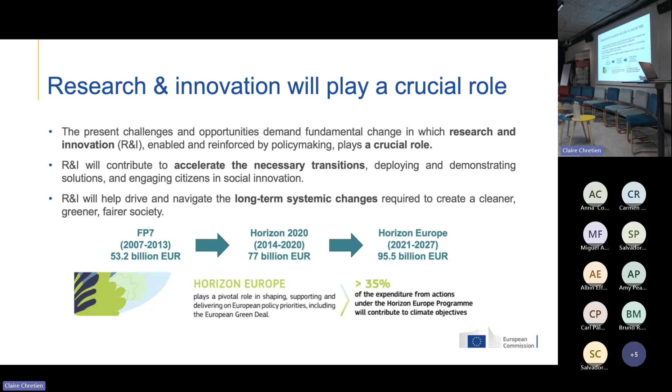Let's now go back to Horizon 2020 and process industries. And there we find the SPIRE partnership, a public-private partnership for the sustainable process industry through resource and energy efficiency. These public-private partnerships are a key implementation tool in H2020 and remain key in Horizon Europe. Through these public-private partnerships, the European Commission comes together with a private partner, and together they address the most pressing challenges of Europe, also through concerted research and innovation initiatives.

So the aim of this partnership was to integrate, demonstrate, and validate systems and technologies that were able to reduce the use of fossil energy, to reduce the use of non-renewable primary raw materials, and at the same time have a significant contribution to efficiency improvement. The relevance of this partnership is clear, as process industries are key for the European economy, but at the same time, they are resource and energy intensive, and as such, today they generate large amounts of greenhouse gas emissions and waste. Therefore, they must play a key part in the transformational efforts that are needed to achieve climate neutrality by 2050. This partnership received in Horizon 2020 more than 620 million euros and had more than 90 H2020 projects.

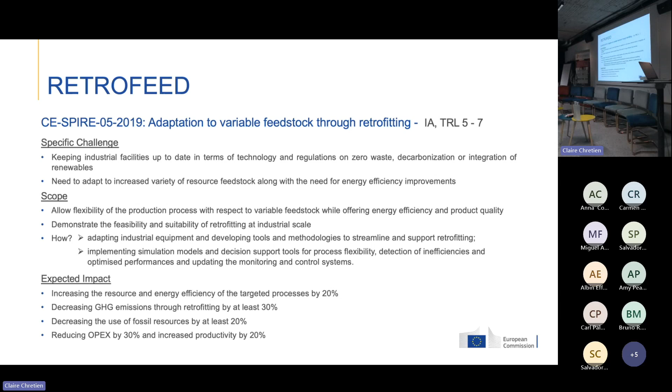Within a retrofitting strategy, the topic makes emphasis on the use of digital tools and advanced control and monitoring systems that allow having a high increase of energy and resource efficiency, while at the same time decreasing greenhouse gas emissions and the use of fossil resources, and also reducing OPEX and increasing productivity.

And indeed, RETROFEED deals with the implementation of a smart retrofitting framework that allows for this high increase of the resource and energy efficiency in 5 energy-intensive sectors through 6 demonstrators at 6 industrial end users.

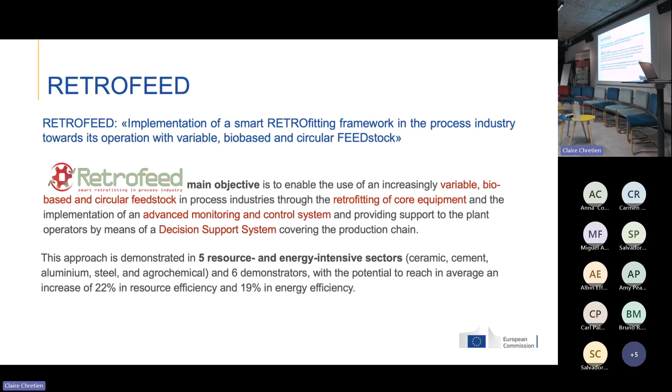Well, we will have the opportunity to learn on the achievements and results of the RETROFEED project during this morning, but from my side, I want to emphasize now the importance of demonstrating the feasibility of these new technologies at operational industrial environment, as in this way they come closer to the final industrial uptake and the final full-scale deployment. And it's actually in this way that projects like RETROFEED contribute to achieving the climate neutrality goal by 2050.

Let me now jump to Horizon Europe. Process industries in Horizon Europe are addressed in Cluster 4, Digital Industry and Space, and in Destination 1, Climate Neutral, Circular and Digitized Production, where we find topics related to 3 partnerships, among which we have Processes for Planet.

And as a continuation of SPIRE, Processes for Planet partnership aims to develop and deploy climate neutral solutions to close energy and feedstock loops and to achieve a global leadership in climate neutral and circular solutions, accelerate innovations, and unlock public and private investment. The Processes for Planet partnership in Horizon Europe in the first 2 years have received almost 315 million euros. And in the coming 23-24 work program, it is estimated to have more than additional 330 million euros.

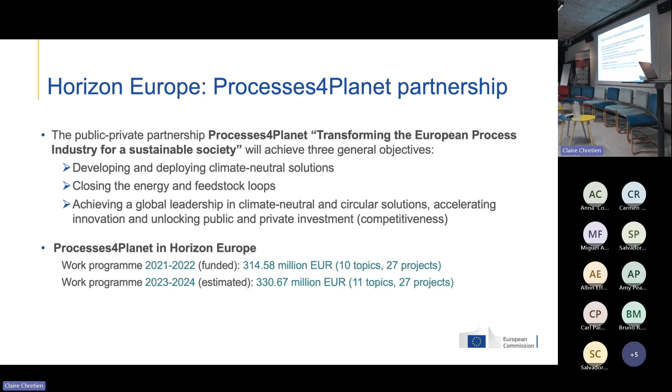So the call for 2023, including topics on Processes for Planet, is already closed. But in September, we have opened the call for 2024 with deadline 7 February. And here we find 5 topics related to the partnership. In relation to energy efficiency and climate neutrality, we have these 3 topics. 1 innovation action on optimization of thermal energy flows in the process industry with a budget for the topic of 30 million euro.

Then we have renewable hydrogen used as feedstock in innovative production routes, which is a research and innovation action with 20 million euro budget. And we have turning CO2 emissions from the process industry to feedstock, another innovation action with a budget of 30 million euro.

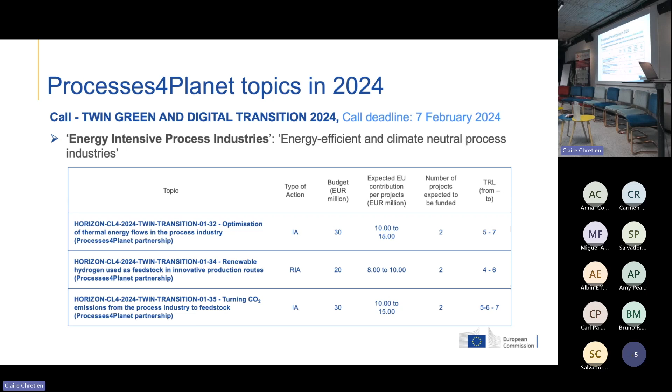In connection to circularity and zero pollution, we have an innovation action, hubs for circularity for industrialized urban peripheral areas in connection to industrial and urban symbiosis with a budget of 40 million euro, and a research and innovation action, breakthroughs to improve process industry resource efficiency with a budget of 30 million euro.

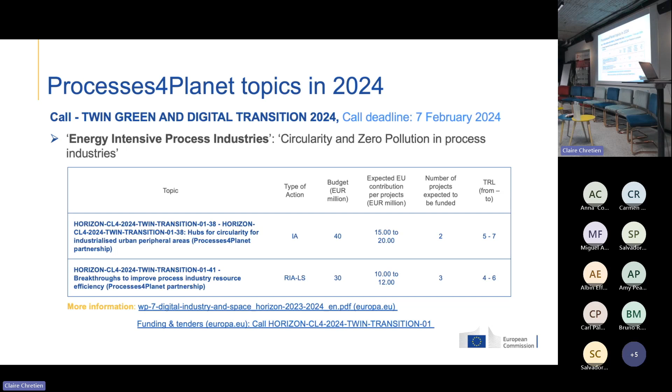If you are interested in joining a consortium or in building a consortium and applying to any of these topics, I invite you to read the full description of the topics in the work program of 2023-2024, Cluster 4, or directly in the Funding and Tenders portal.

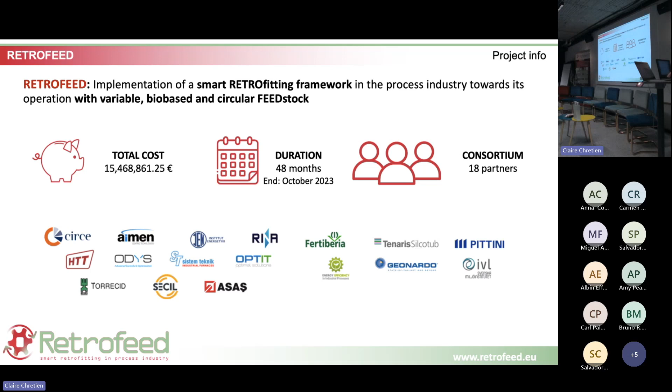So our project is an industrial project. We have a total of 6 demos in 5 sectors, and we have a total of 18 partners with the RTOs. Our project has lasted 48 months and has a large budget with a large contribution from the European Union. Our main objective stated here is to enable an increasingly variable, bio-based, and circular feedstock in process industries.

And we aim to do this through the retrofitting of core equipment and the implementation of advanced monitoring and control system, and providing support to the plant operators by means of the development of a DSS covering the whole production chain. As you can see, we are implementing this approach in 5 sectors: the agrochemical, aluminum, cement, ceramic, and steel.

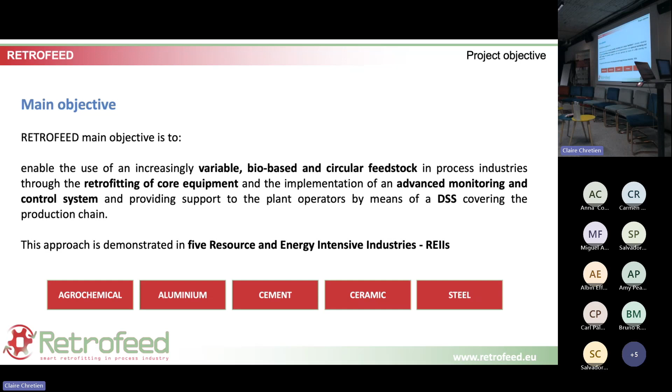These are our intended impacts. As you can see, they are challenging impacts. So we aim at a 22% in resource efficiency, 19% in energy efficiency, and we also, of course, want to save emissions in CO2 and save costs for the companies.

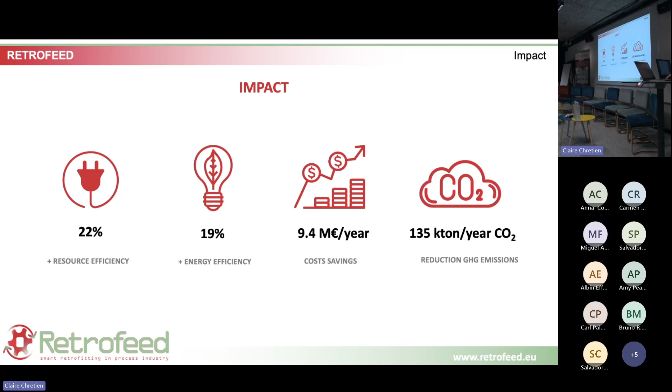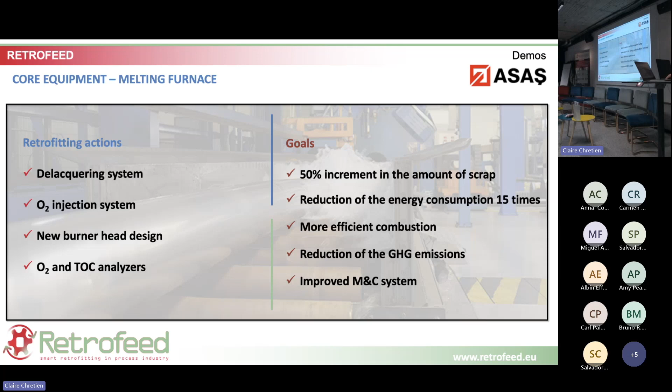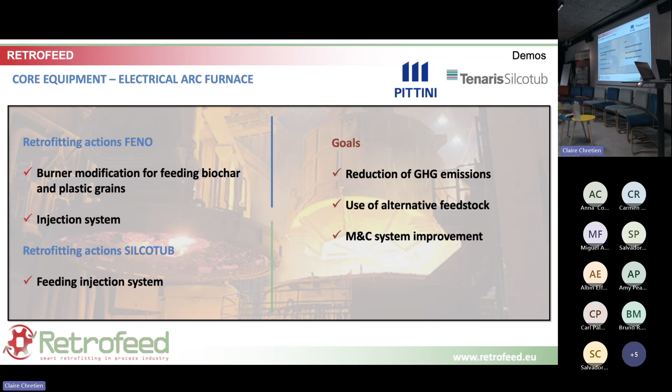In the steel sector, we have two companies, Feno Pittini and Tenaris Silcotub. The goals in both cases are similar: to reduce GHG emissions, use alternative feedstocks, and improve monitoring and control system. In Feno, they have already installed and are using a new injection system and a burner modification to feed biochar and plastic grains, which is allowing to reduce the amount of anthracite that they are using, so they are reducing their dependence on fossil fuels. Similarly, in Silcotub, they are using a new feeding injection system to use alternative materials.

In Fertiberia, in the agrochemical sector, the goal is to replace 10% of the currently used phosphorus sources, to recover valuable materials from waste, reduce cost, and improve monitoring and control system. Here, the main retrofitting action is the installation of a new reactor, a new design of a chemical reactor for these alternative phosphorus sources.

In Secil, in the cement sector, the goal is to reduce emissions, CO2 emissions, to replace the currently used fossil fuel by alternative materials, RDFs in particular, to increment the efficiency of energy and also to improve monitoring and control system with novel monitoring tools based on imaging and also other imaging techniques to check the quality of the clinker.

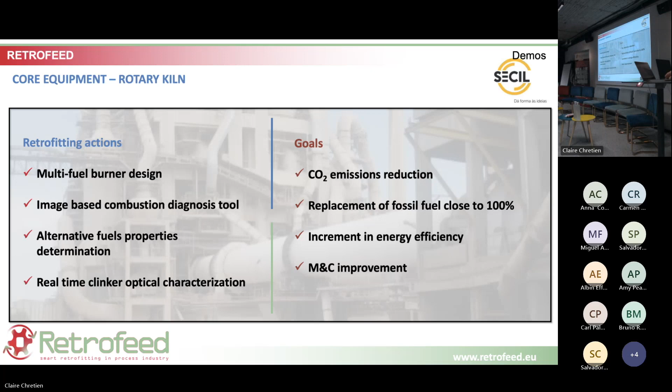So they have implemented already a new multi-fuel burner that is what allows them to use RDF. As I said, the image-based combustion diagnosis tool, the monitoring systems to assess the quality of the clinker. And this has already been installed, that is already running also.

In the ceramic sector, Torrecid, they aim and have achieved already savings in energy and material, optimization of the combustion thanks to the recuperation of heat from the fumes of the furnace, and improve their monitoring and control system also. So they have already installed the new heat recovery system, the new sensors based on imaging and oxygen sensors, and they have connected these sensors to their control system.

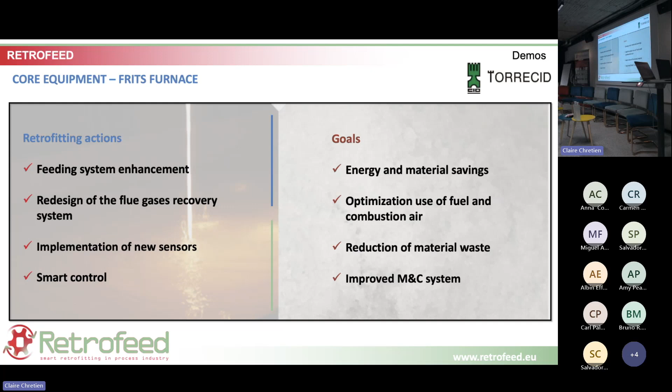So this was the demos in a nutshell. And to conclude, I would just like to say that I consider that this has been a successful project so far.

We have faced two major challenges, which are the COVID pandemic and the later energy price crisis due to the invasion of Ukraine. In spite of this, we have managed to have 5 of our 6 demos up and running already and obtaining results. Only one demo is delayed, but they are going to complete their activities in the next months. So we can say that we have all demos almost running.

Our results are in line with the foreseen impacts already, and I'm sure that they will be better when all fits in place. Several of our solutions are beyond intended TRL because they are already in the market or almost market ready. And so, as I say, I consider this has been a successful project, and I'm really happy and proud to have been a part of it.

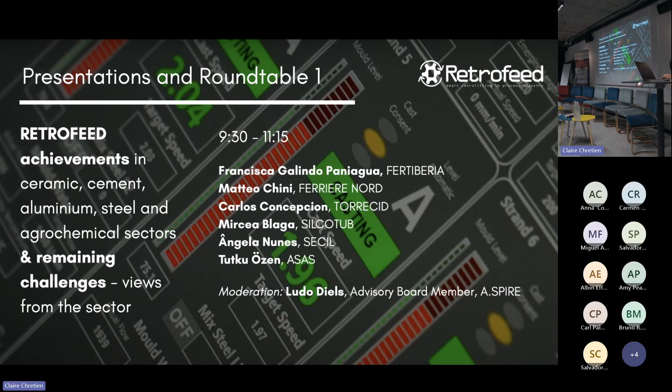Good morning. My name, as you can see, is Francisca Galindo Paniagua. I'm working for Fertiberia Group. I'm the technical director, and I'm the leader of Work Package 9, which had to do with the demo in the agrochemical sector. I will start explaining what is Fertiberia.

Fertiberia is a fertilizer company, and we like to say that it's not only a fertilizer company, but we are very much concerned about environmental issues, and we got a lot of solutions, not only for the farming, but also for environmental application. For example, the reduction of NOx in the combustion processes.

You can hear me? Can you hear me? So I can leave the micro here.

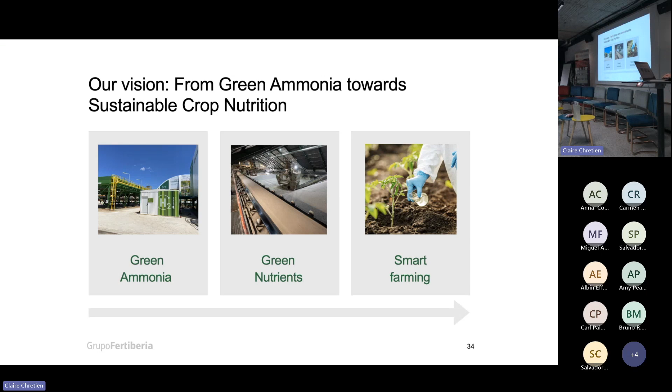It's all based on green ammonia, because this is a roadmap to 2035, where you can see we have reduced a lot of GHG gases up to more than 50%, but there's a gap that is needed to be reduced, and it only can be done through green ammonia, because ammonia is a raw material for all nitrogenous products, which is the main nutrient for fertilizers.

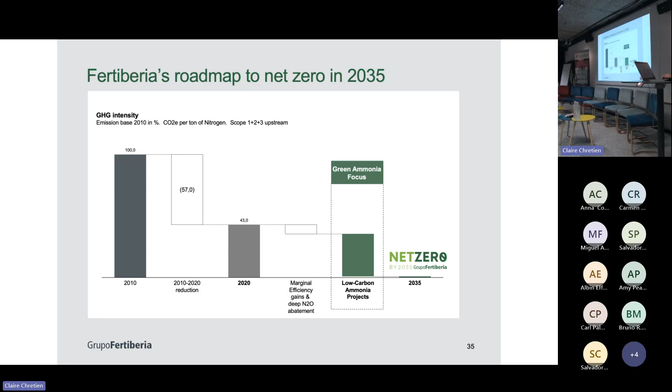This is our net zero project. There are many projects involved in this net zero for 2035. And we have to say we are the first company in our sector in Europe that is going this way and have done the first step. But here you can see how many projects we got related to this net zero goal.

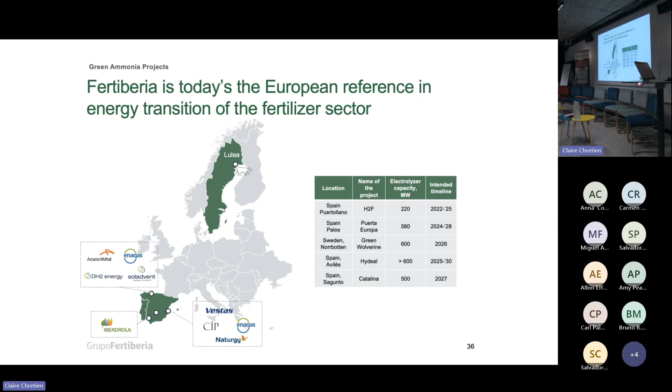In this moment, we are running 5 projects, 4 of them in Spain, all to produce green hydrogen, and from green hydrogen, green ammonia, and also a green complex in Sweden, in Luleå, based on green hydrogen to produce green ammonia, and so all green fertilizers. Green.

This is our first step, which is a reality. It's in Puertollano. It's based on a solar field of 20 megawatt. We produce from this dedicated solar field energy for electrolyzers, and from this electrolyzer we produce green hydrogen and then green ammonia, and it's now a reality. And the last step of the reality is the new Fertiberia line, which is the Impact Zero line, fertilizer based on this green ammonia.

So I will go directly to our project, which is this retrofit for NPK plants in Huelva. The main objective is the valorization of waste streams as alternative phosphorus and sulfur sources in the Fertiberia site in Huelva. That means we are going to produce fertilizer with at least 10% of the raw material based on circular economy phosphorus.

We already have run some Horizon projects which are based on this circular economy, one which is finished, and a parallel one. But this is very important for us because we are going to use this raw material directly in our plant.

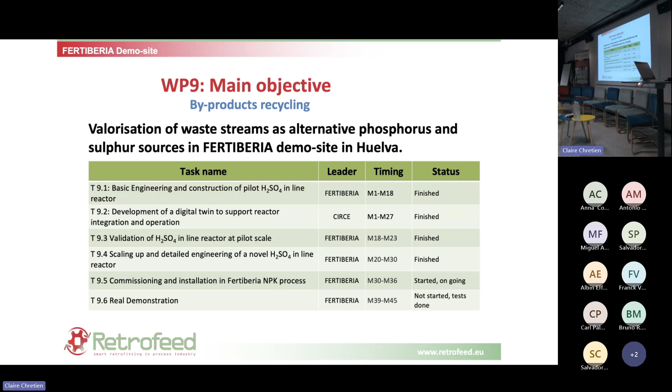For that, we have designed a new reactor, which will be run, but has been run in a pilot plant, to produce ammonium sulfate with ammonia and sulfuric acid in a direct reactor to the granulator. This is very tricky because the reaction is very exothermic and produces a lot of problems in the plant. But in the pilot plant, it's been very successful because we even reduce a lot of the energy consumption. You will see that. Well, in the last slide, I showed you all the steps, all the tasks we have done for this project.

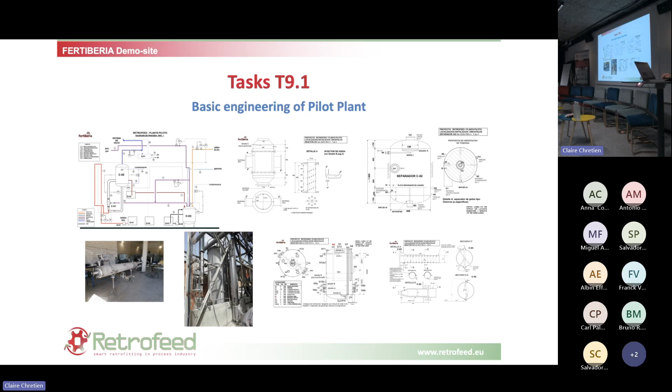The first step was the design of the pilot plant, the basic engineering. It was done in time. The second one is the development of a digital twin. The third one is the pilot plant. It was very much delayed due to the pandemic.

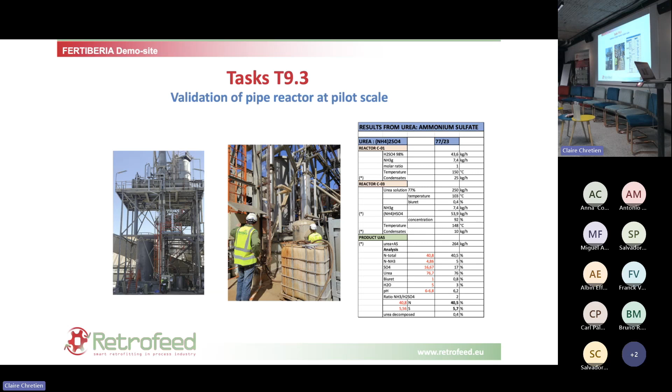We suffered a lot of delays due to the construction of the equipment, and also then the running of the plant, because after the pandemic there was a big energy crisis due to the war and due to the rise of prices. So we had to stop the main plant, and without the main plant running, we couldn't run the pilot. So the delay was for more than 1 year, and well, at last we could run the plant and have very good results. I will talk about them.

Task 9.4 was the scaling up of the pilot. We could do it even before the pilot, but we finished it. Here you can see some part of the engineering. And the fifth one was the commissioning and installation in Fertiberia NPK process. It is unfinished. Part of it is done. For example, some modification in the granulator or new equipment that had to be installed.

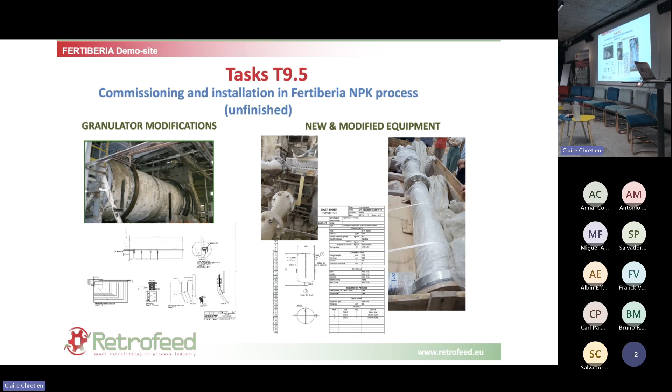And the main reactor that you can see on the right of this slide is the pipe reactor that will be installed at the beginning of next year. It's already in the plant and waiting for the production to stop for a long time, because we need at least 1 month.

This is a compromise. We agreed with Lucia to do some demonstration as an alternative to the last task, which is the real demonstration, but using some sparger we installed in the granulator and premixer, but the result was not conclusive because the plant had a lot of unstable situations.

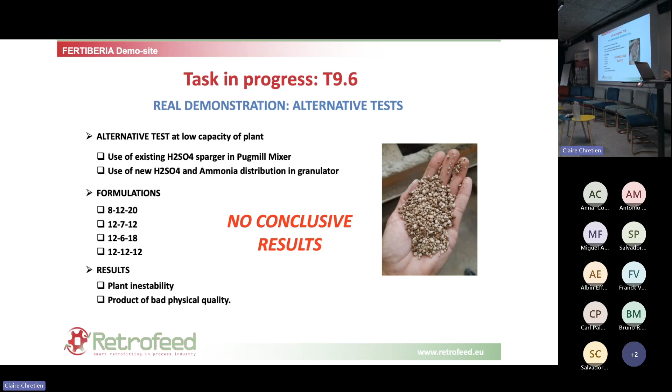And these are the last retrofit results. I would like to show you it in capital letters, but I cannot boast as we didn't finish the project yet. But I can have some results from the pilot plant. We tested and proved that we can have an important reduction in energy consumption, as the plant is now consuming half tons per hour of steam that is produced in the boiler using natural gas, and also using natural gas for the dryer. We reduce this steam consumption by 100%, and we will reduce also the consumption in the dryer because the temperature of the reaction will be raised, and so we won't need this steam and lower natural gas.

Also, we have demonstrated that we can replace the ammonium sulfate by the sulfuric acid and ammonia reaction. In the plant, we've got a successful result. And so we can have an acidic slurry that can digest the ashes and struvite, etc., that we are going to use in the real plant.

Good morning everyone, my name is Carlos Concepcion from Torrecid. First of all, I would like to thank Roberto for making the introduction of Torrecid and the work done in the framework of the RETROFEED project.

Torrecid has been in charge of the ceramic demo within the project, and the overall objective was the retrofitting of equipment and implementation of advanced monitoring and control systems, allowing the use of variable feedstocks, improving the overall environmental performance. Why is this important for us? It's important because improvement and innovation is already written in the mission of Torrecid, which is to provoke change through global leadership innovation of process and products, creating new solutions and technological and fashion trends. This is why innovation and improvement is important for the company.

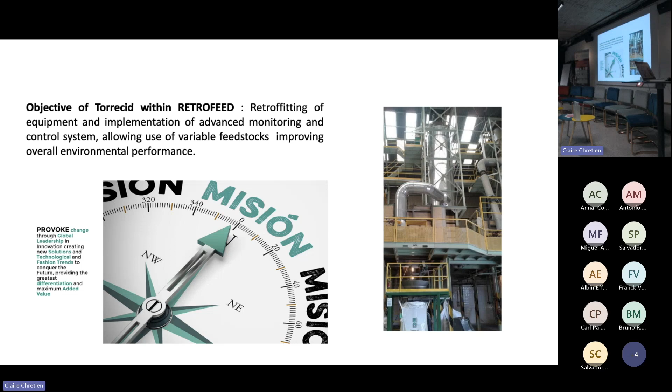You may ask, who is Torrecid? Because some of you know Torrecid, but not all of you. We are a globalized multinational family founded in 1963, supplying products to the ceramic sector, and nowadays also the ceramic, plastics, textile, and glass sectors. We supply a lot of different products - I don't want to go through all of them: frits and glazes, enamels, ceramic decorations, inkjet inks, pigments for plastics, glass decoration, construction materials, textile decoration, and so on. The company has 29 subsidiaries throughout the world, and 7 of them are located in Europe.

You may ask now why retrofit is important for us. Retrofit is important because we are an energy-intensive industry. We use more than 25,000 tons of natural gas per year for the melting of the frits. Not only the natural gas and the CO2 emissions, but also we use a lot of water - more than 500,000 cubic meters per year are used in the process, and we have to refill this water.

Also, the basic product, which are the frits molten in the furnaces, we change the product every week, more or less. So we have a huge range of products being molten in the furnaces. Consequently, we produce a lot of different waste, and we have quite flexible feedstocks. Therefore, we need to reduce emissions, reduce natural gas consumption, improve the performance of the furnaces, as well as reduce all the waste and streams involved in the process. This fits perfectly into the RETROFEED project.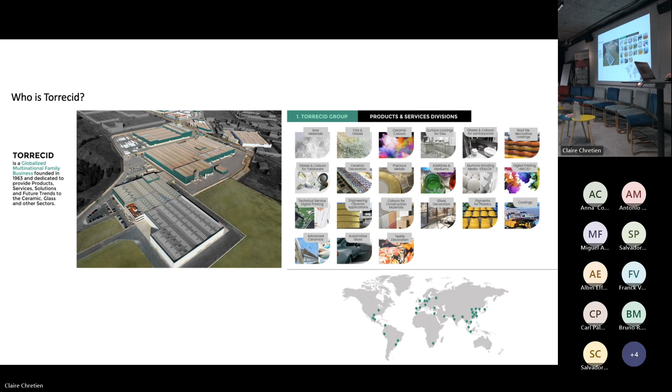What has been done in Torrecid? This is the basic diagram of what a smelter is in Torrecid. We have raw materials that come into the smelter, we have natural gas, oxygen, air. We get fumes at 1,300 degrees, and they go out to the exhaust. Then the molten feed comes out, is water quenched and dried. So we need a lot of gas, a lot of water, and we get a lot of fumes out of it. So what has been done in Torrecid?

We have optimized the thermal recovery of the waste heat. We have developed tailored control and sensor systems to optimize the material and energy flows. We have developed a new DSS tool, and we have worked towards the reduction of waste streams. These are the 4 areas in which we have worked.

And what has been achieved in the RETROFEED project?

We have validated optimized waste gas recovery systems, allowing us to reduce CO2 emissions by 15%. A new high-temperature heat exchanger has been installed. We have modified the burners so we are able to use waste streams of up to 800 degrees in the burners as air.

We have also modelized the frit and its composition, adjusting the compositions of the frit to the melting conditions. Together with the partners, we have developed and validated a DSS tool.

This system has allowed us to optimize the program of the frits being molten. As I told you before, in one month we can melt up to 15 different compositions, and we have been able to reduce waste materials by 50%. We have also installed novel sensors, approaching Industry 4.0.

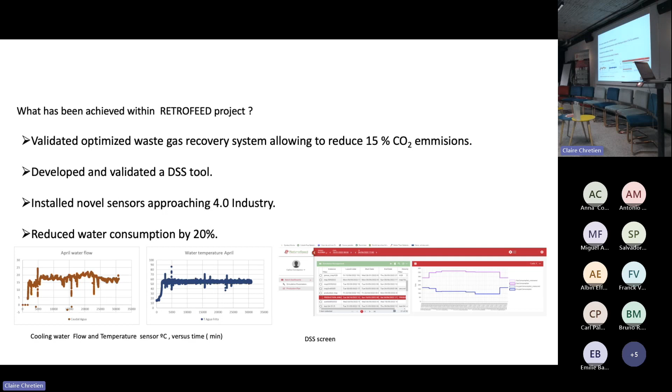So overall, we can say that this has been a quite important project for Torrecid, allowing us to reduce the overall impact of the company on the environment.

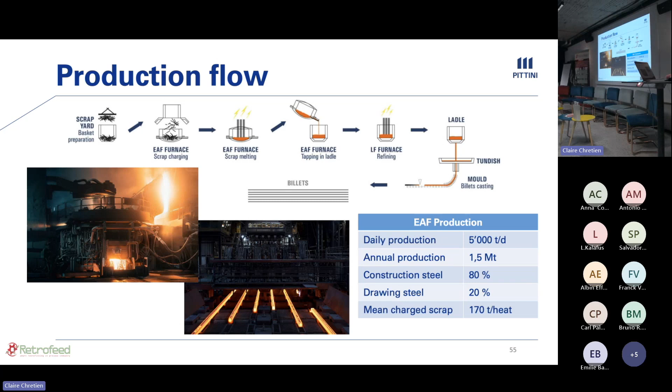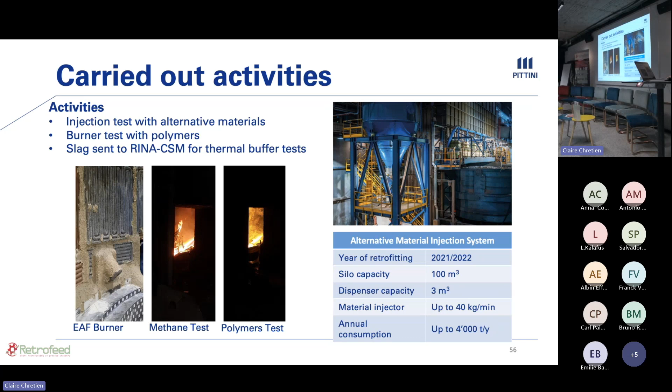On the right you can see our injection system, which is a silo with a capacity of 100 cubic meters. We are able to inject around 40 kilograms per minute of material, with an average consumption of around 4,000 tons per year of materials.

These are the results for the injection system. We tried several materials: polymers, tire grains, blended polymers, and at the end also biochar. We had a huge number of trials with tire grains.

One important aspect is the biogenic content of the material, since you have almost 25 to 35% biogenic carbon content with polymers and tire grains. Another important aspect is biochar, as of course all the carbon there is coming from biomass.

These are results comparing two years. We can see that in the first year, 2022, we had a higher substitution rate, which means we were not able to manage the material properly.

But in 2023, we enhanced our ability to inject these materials, so we lowered the value from 3 to 1.3. This is, of course, the specific value of the materials compared to the liquid steel produced. One aim is to reach a value of 1, meaning that anthracite can be replaced with a 1:1 ratio using tire grains.

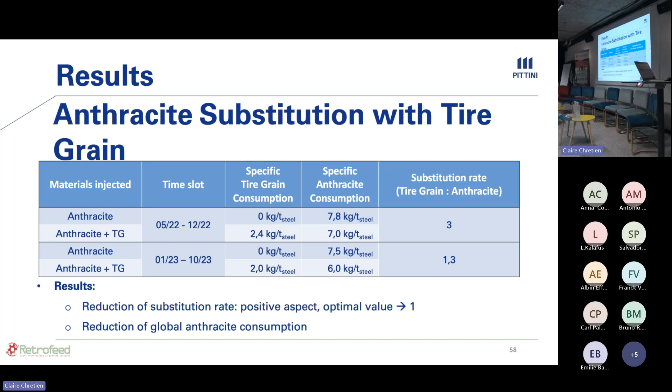But also, even when we are not using alternative materials, we are now paying more attention to the anthracite injection in our furnace.

These are the biochar results. We had several trials over these two months, and we can see that we also lowered the consumption of anthracite compared to the tire grains. As mentioned before, we pay more attention to this aspect, and we had trials with biochar achieving a substitution rate ratio of 1.5.

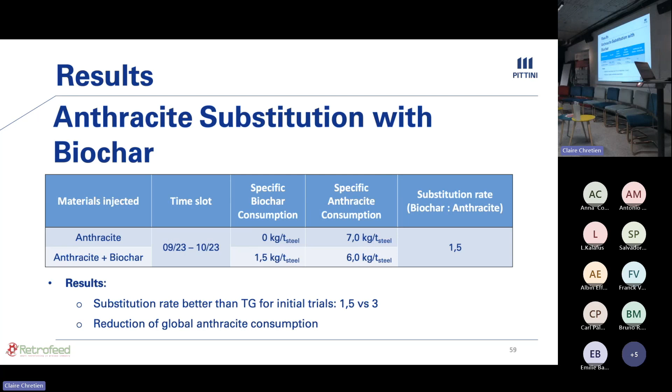These are our impact results. We can see a comparison between tire grains and biochar, and the biogenic content in that data is a very important parameter. As you can see, we are able to reduce fossil CO2 emissions in a greater way by using biochar. This is almost a simulation of 1 year of specific fossil fuel reduction by using tire grains or biochar. We are able to reduce the CO2 of a 1 year production by those quantities, and of course we are able to

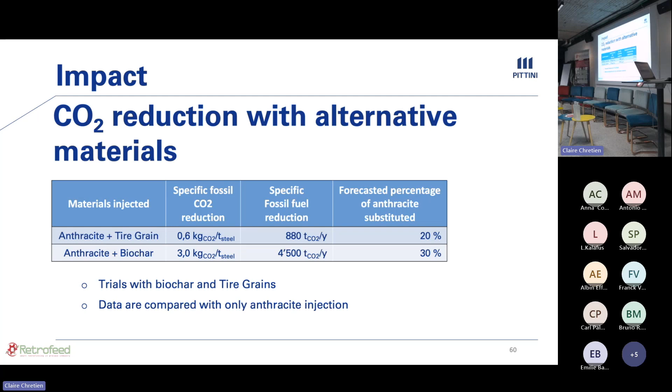substitute 20% of anthracite. These are forecasted data, and we saw better results with biochar, so we are pretty confident that we can replace 30% of anthracite with biochar. And that's it.

Good morning, everyone. I'm Mircea Blaga. I'm going to represent Silcotube in this short discussion and journey we had in the last 4 years together.

Several words about Tenaris Silcotub. We are part of Tenaris, which is a global leader in seamless pipes production and related services. In Romania, we have an integrated technology being present in several places, but I would mention here only the 2 big integrated plants we have: one in the north part of Romania, and I would start with the south, where we are present producing steel, electric steel, which is a very important detail, and we will see it over the presentation.

Then the north part of the country, where we are rolling the bars that we are casting, transforming them into pipes for serving 4 main technologies and industries all over the world: automotive, energy, power generation, mechanics, and so on and so forth. Then around 2,000 employees at the level of Romania.

We have a very clear target, which is 100% connected with RETROFEED and everything we were trying to do in the past years, because we have a big commitment in front of our stakeholders at the end of the day, and our community, to try to reduce the CO2 emission by 30% by the end of 2030.

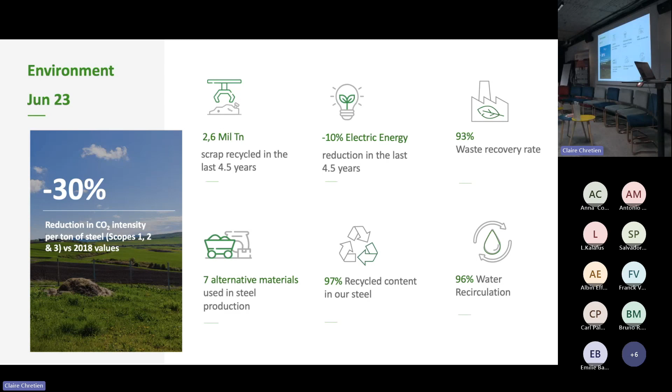And how was this possible? By bringing more and more scrap into our process, becoming more present and trying to collect and prepare it as well as possible, reducing electrical energy—we reduced electrical energy by 10% in the last years. We have a 93% waste recovery rate. Our water, for example, from the process is 96% recirculated, and the 4% that's not, it's lost due to vaporization because we are still working with hot metal, so part of the water gets vaporized. We have 97% recycled content in our steel, and 7 alternative materials integrated into our process, 2 of which were targeted within the RETROFEED scope.

2 short words about the electric arc furnace technology. Tenaris is using only electric arc furnaces, so we are producing around 4 million tons of steel per year only by electric arc furnace. Electric arc furnace is by far the cleanest technology available in the market when it comes to CO2 emissions. And here we have some interesting figures: for example, 1 ton of recycled steel saves 1.4 tons of iron ore, then 1.5 tons of CO2 emissions, and so on. This is what we are trying to do.

And here is the footprint of Tenaris Silcotub, because we are recovering and recycling more than 640,000 tons of scrap per year.

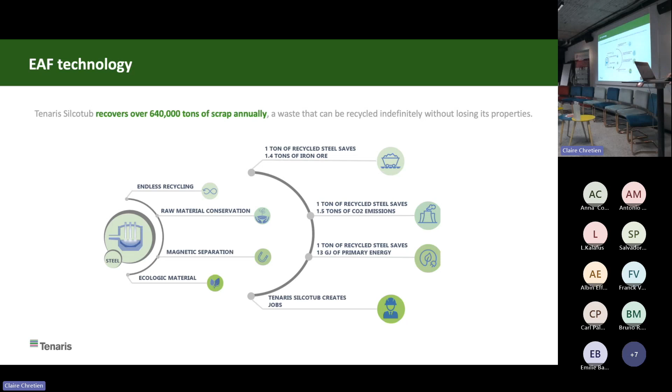Then, within the RETROFEED boundaries, as I was saying, we try to identify on the market some wastes and furthermore transform them into raw materials in order to enhance the circular economy, to reduce the CO2 emissions. And this was pretty much what we were able to get, just to have also an idea about the type of materials we are looking for.

So this is a picture of tires and then of plastics that we were looking for on the market and trying to transform them after various processes into good and reliable byproducts, I mean, raw material, I would say, for our process. Each material has its certain characteristics, some of them very challenging for a steel producer because there are some elements which are nocive for the steel quality.

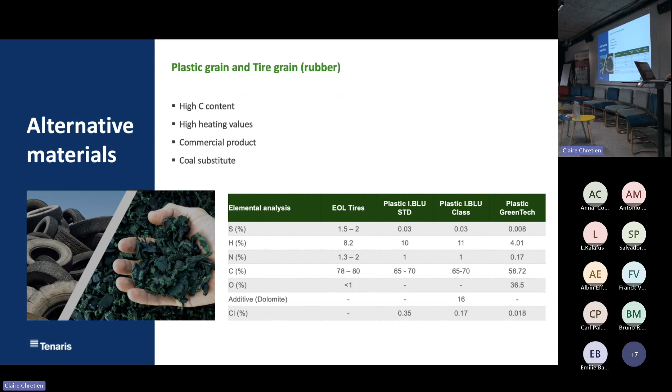But we are proud once again to say that at the end of the day, we were able to integrate the materials. This was pretty much, and I will not spend too much time on it, the long journey we had together with all the collaborators.

And actually, I take advantage to thank everyone who was involved in this, because for us, as Tenaris Silcotub, this was the first time we were in this kind of project, and we were impressed by the complexity of the activities and all the processes and all the partners connected to one single technology at the end of the day. I just want to express my personal opinion, that it was something I was not expecting initially, but very impressed at the end of the day. And once again, thank you very much to everyone.

Then this is the performance we obtained so far. We have the 2 materials, the rubber and the plastics that we have seen previously, with certain challenges and still subject of several developments, because in an electric arc furnace it's not so easy to integrate new materials, especially for the safety of the process. We are still working with liquid steel at over 1600 Celsius degrees. So we have to be very careful. We have to take care of our people at the end of the day. So this is why we are making good but small progress toward the integration of these 2 materials.

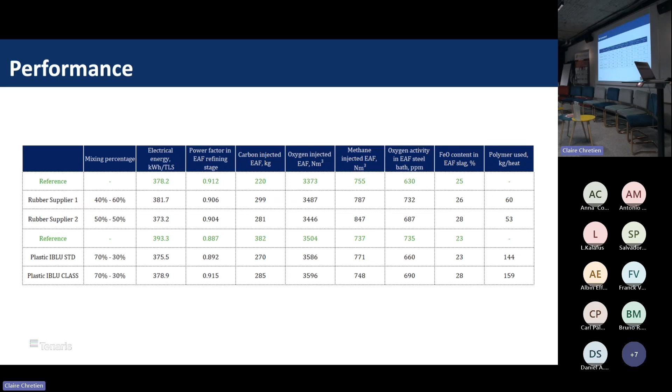I would stop more on the plastics because with plastics we were able to integrate faster than we were expecting, and also with very positive results, considering that we were able to replace 100 kilos of anthracite with 150 kilos of plastic, so almost a ratio of 1-to-1. And we are talking here about a material which cannot be reused or recycled anymore. So it's a waste for our environment, and now it's a product for our process.

And this is pretty much what we were expecting at the beginning and what we were able to obtain. So we are present in the circularity and continuously encouraging the circular economy. We were able to reduce the CO2 emissions, and of course, the resource conservation.

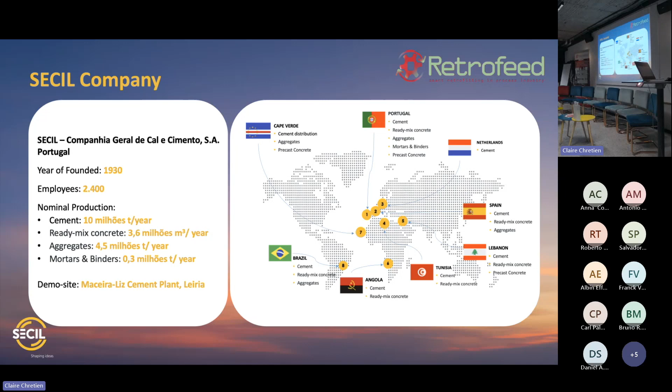So I would say that our goal is directly linked with our roadmap and our decarbonization. You know, cement is responsible for a huge amount of CO2 emissions. And we are really committed to reduce, and our CEO signed, together with GCCA, the commitment to achieve neutrality in 2050. So for us, all the issues that allow us to reduce CO2 emissions are our focus. Decarbonization for us is a priority. That's why this project is so important for us, because the goal is exactly that, CO2 emissions reduction.

And you would say, how? Well, you know that in cement, we have two sources of CO2 emissions, one linked to the combustion process itself and another linked to the process due to the calcination of the limestone. And that one is very difficult to avoid. But in the combustion, we can do a lot. And so our focus in this project is directly linked with the combustion.

So with this project we wanted to replace fossil fuel and increase the rate of alternative fuels. We already consume about 50%, that's our substitution rate, but we want to achieve 100%. But these alternative fuels are relatively poor in terms of energy. It means that we need to complement them with something else.

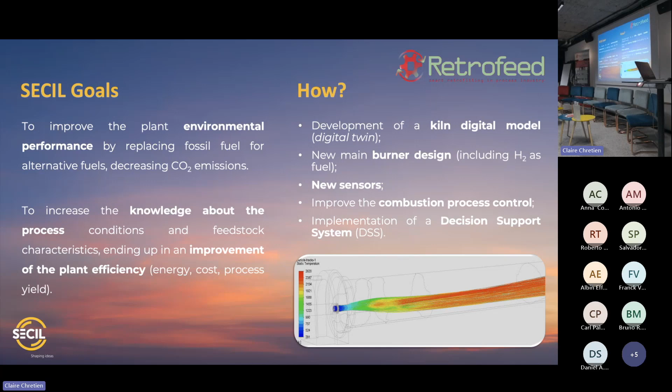So here on the right side, you see our line and the new sensor locations. A big part of these sensors, as Roberto said before, were developed within the project. So you don't find them on the market. It's quite new, and they are installed and they are working. And we are now getting very good data that allows us to validate the model and to integrate this in our own control system. On the left side, you see the modification that we made in the main burners. So we have now a satellite burner that is already installed, and we now get the first trials.

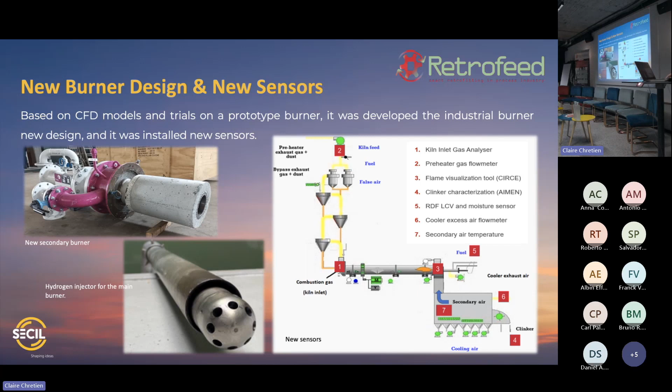And jumping directly to the results. You see here the annual average substitution rate of 2023, as I said before, around 50, so 49%. And during the trials, we found that it is possible to increase the rate from 13 to 34%. So in the best period, we have a 34% increase, and, which is also very interesting, a reduction in thermal consumption of about 5%.

So, of course, there is another good news. There are no changes in clinker quality, because this could be a risk when you increase the substitution rate of alternative fuels a lot and so quickly. You may lose quality in the clinker. That was not the case. And we clearly see that we get a very high stability in the kiln and in the flame. So this is really promising for us.

So this leads directly to a reduction in CO2 emissions in the combustion phase of about 7 to 11%. So we are really confident that these results are sustainable and we can go further. We will continue the tests toward a final decision on implementation, because, you know, we are dealing with big volumes and we need to be very sure. But until now, the results we get are really promising.

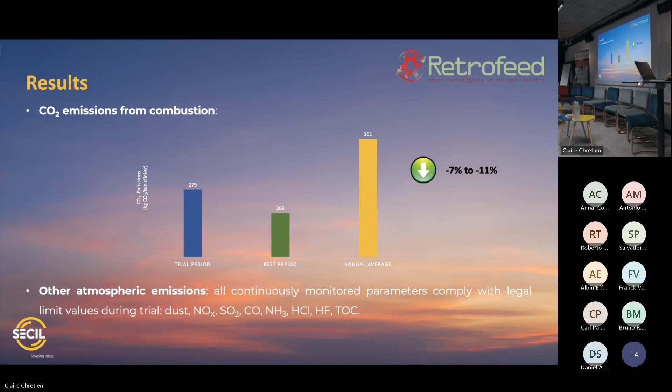So I would say that our impact is basically process optimization. And with this, we really reduce carbon footprint and energy consumption. That is proven already. We improved productivity, so we don't have so many stoppages during the process. This, of course, is directly linked with the energy consumption, but also with the productivity. And we expect to improve clinker quality, because with stabilization, when we deal very closely with all this information, we for sure stabilize the kiln at one level of clinker quality along the year. So the standard deviation of the main parameters that we have to control in the clinker for sure will be reduced.

And of course, we validate that the use of green hydrogen is possible, and the development of machine learning models for improving the operation. And we want to replicate this for our sister kilns and other cement companies, you know, our colleagues.

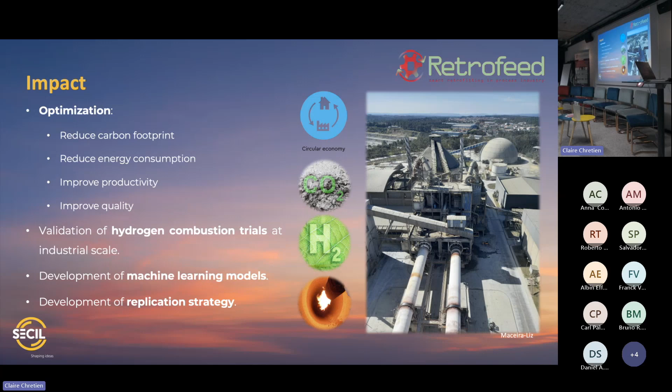My name is Tutku Özen. I've been working in Asaş for 5 years. This project is also important for the aluminum sector and Asaş, as I will be mentioning in my presentation, but it's more crucial and important for me too, because this is the first project in Asaş I have been involved in from the beginning till the end. And I'm very glad to show you the results of the project today.

So Asaş is an aluminum company founded in 1990 in Istanbul. Today it has over 3,000 employees, and all of the production plants are located in Sakarya. Also, we have a head office in Istanbul, and a logistics center in Neuwied, Germany. It is working in 5 different areas. One of them is aluminum extrusion production. The other ones are flat rolled products production, roller shutters, steel shutter systems, PVC windows and door systems, and finally, aluminum composite panels. All of these production plants, as I mentioned, are located in Sakarya.

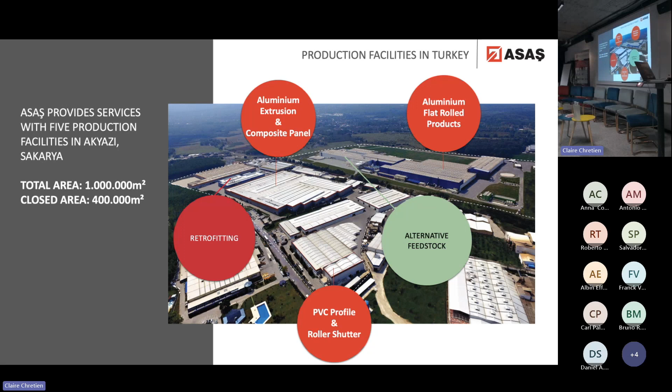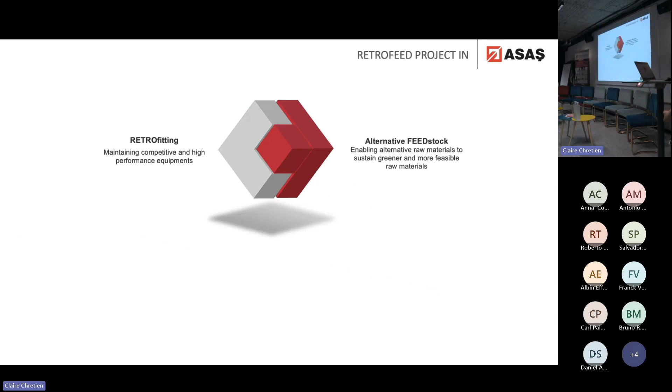The retrofitting actions for this project are carried out mainly for the extrusion site's cast house, and the alternative feedstock has been located in the flat rolled products production line. And this is Asaş GmbH in Neuwied, Germany. We are adding value for helping create a better future. In the retrofit project, as you understand from its name, we have retrofitted the furnace and we have enabled new alternative feedstocks. In this project, as a pilot plant, we took the 4th melting furnace in the extrusion site's cast house.

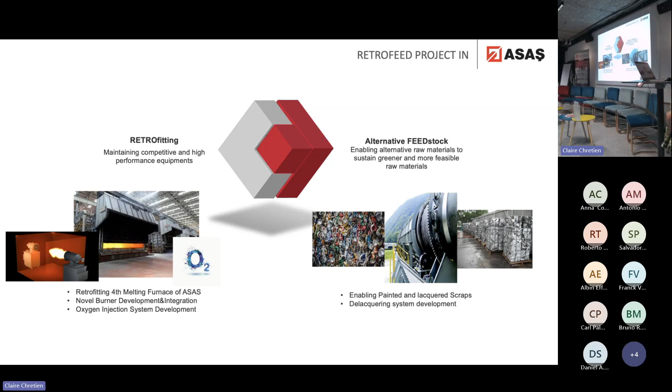Also, in the aluminum sector, normally usage of painted, lacquered, or oily scraps is not possible due to the emissions. So, in order to make huge scrap recycling in the production sector, we should be able to pre-process them and then use them in the melting furnaces again. So a pre-processing delacquering system has been established. To be more detailed, in the retrofit project, new burner development and integration has been achieved. Advanced monitoring and control system integration, oxygen injection system integration, and decision support system integrations have been done.

As you can see, this is the new burner. It has been developed with the safety simulations carried out by IEN. Also, the oxygen injection system increases the oxygen amount blown into the furnace, and it creates better burning efficiency in the furnace. The monitoring and control system integration yields more controllable and better monitoring of all of the production plant. And finally, the decision support system has been tried, and I believe that it will be very efficient for all of the production industries.

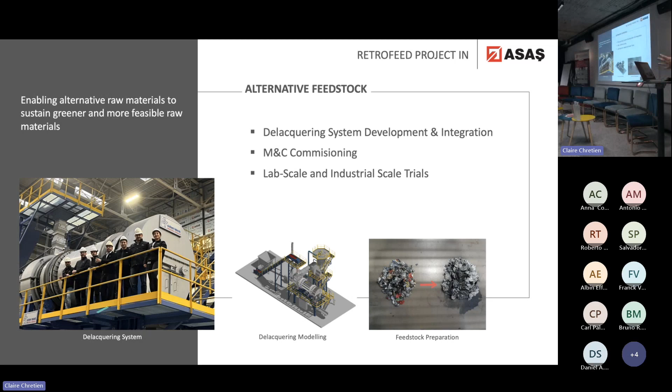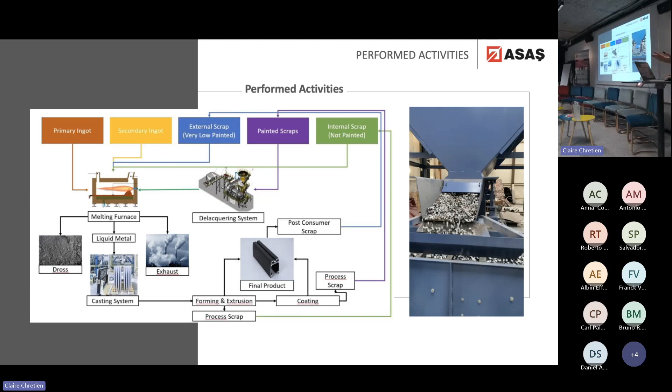For the alternative feedstock, here you can see the delacquering system. The delacquering system development and integration has been carried out in the retrofit project. As you can see in the last image in the slide, the machine and the delacquering system turn lacquered, painted scraps into uncoated ones that can be fed into the furnace. For the results, I'm just quickly passing, I don't want to show the video because it's a little bit long. These are the main production actions that we have carried out with this project. We have not only increased the energy efficiency, but also increased the usage of alternative feedstocks. These are the results and the goals that we stated in the proposal.

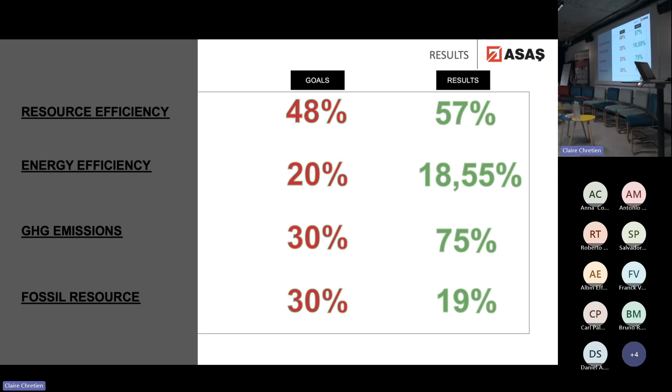As you can see, we have achieved a resource efficiency of around 57%. The energy efficiency is very close to the goal, and the fossil resource efficiency is very close. As you can see here, greenhouse gas emission is measured based on CO2 emission. If we choose all of the carbon equivalent components like NOx, carbon, VOC, etc., the number will be decreasing. This is the best result, but for the carbon dioxide case, we have achieved in one trial a 75% decrease.

And for the impact, as I mentioned in the results, we have disseminated this project in conferences too. Also, the burner head solution developed by this project is now patented and it is available in the market too. We have competed in project competitions, and in all of them RETROFEED was a finalist. And also we presented this project in the Process for Planet Info Day in Turkey, which Mr. Diaz has already participated in.

In the future, we have 4 other melting furnaces, and we are willing to increase the results and exploit the results in the Asaş site. All of the aluminum producers are targeting decreasing the carbon equivalent ratio, so they can use the delacquering system and these burner head solutions. Also, the decision support system, digital twin, and machine learning model can be used in every energy intensive sector. And this is all from my side.

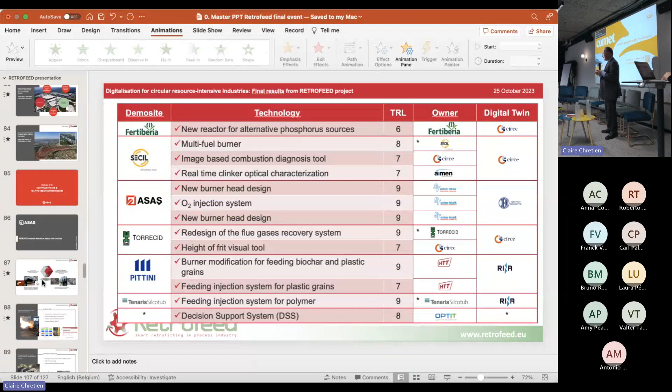And some of the dealings with their own government, sort of saying, well, here's the target, do it. It's not that simple. And you've proven that. And also in terms of dealing with a pandemic, dealing with an energy crisis, there's always going to be some crisis in this world that you're going to have to cope with. And you as people in companies probably understand that more than anybody. Right now, we want to take a much more horizontal view, looking at some of the things that bring us all together. And so we have a presentation by Luca on DSS, Luca from OPTIT.

And DSS keeps coming up all the time. And we see the whole decision making and the need for rigor, especially as we're getting much more sophisticated, much more complex in what we're doing. Then we will have Diego come and really look at the replication potential. And this is absolutely fundamental to where we're going in the future in terms of bringing together all the pieces.

Then we bring together 1, 2, 3, 4, 5 people who aren't from the demonstration sites, but are part of the glue that holds everything together. And where's the future? It's with all of us. We have to remember that doing this is a human endeavor. When I first started working in energy efficiency, there was a book from the United States called Energy, the Human Dimension. Well, the human dimension comes into absolutely everything, whether it's 2 people working together, somebody from senior management working with an engineer or whatever. It's all about that, and it's about decisions.

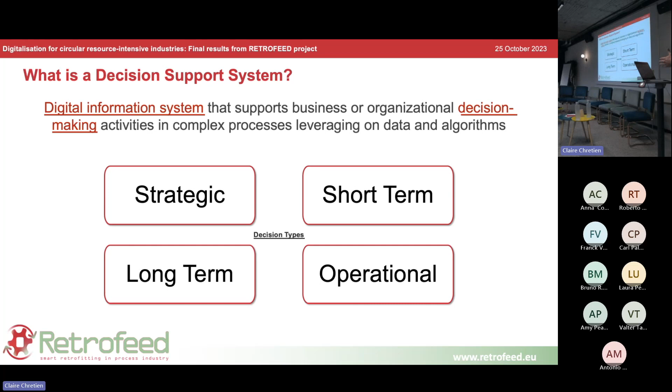And these algorithms and data can be leveraged to support the decision in these cases, considering also the period is very volatile, and operational decisions, which are day-by-day situations where operators are starting to feel the need for tools that can support their day-to-day activities even more. What we tried to do within the project is to find a way to integrate the DSS within existing tools. So we're talking about the next level and how to really implement the Industry 4.0 paradigm inside industrial plants.

We know that from the bottom, we have equipment, sensors, PLC systems that collect data. SCADA systems have been implemented for many decades now. And now a lot of this data is being used in enterprise management systems, ERPs. Companies are developing internal solutions for business intelligence. They're starting to develop more advanced solutions than Excel, but now there's the need to integrate, get this big data, collect it, and run more advanced modeling, which could all be summarized in a decision support system.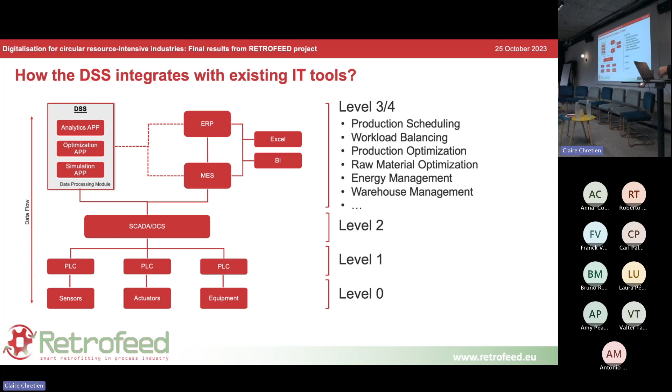And then, of course, warehouse management, logistics, you name it, you can build applications and algorithms to support the operators in there. During RetroFeed, we tried to build not only a specific model for the core business, but a process which could be leveraged across the entire industrial chain and used flexibly in different industries.

So we started analyzing the core process, and with the help of other partners within the project, we built digital twins of furnaces, digital twins of kilns, and other core parts of the system. But we also looked at the entire value chain process, starting from the raw materials all the way to the process output of this core section.

So we built the optimal raw material selection model. It's still in a beta phase, but I think it's a good start to begin looking at raw materials and try to optimize them.

We built a model that could be used in the future for flexible use of energy input, so electricity, fuel. Once some of the process is electrified, it could be leveraged differently depending on price, market conditions, weather - these are some of the things we need to look at.

And then we analyze and monitor what the outputs are. On the output side, we start to link, because the operator always looks at the performance of the system - how many tons of steel I've done, what energy I used, what material I used. They don't really check the cost of that process.

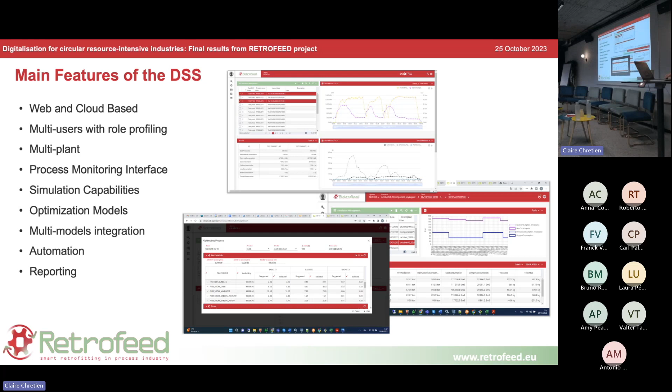And I want to see how the production plan could be done optimally. Then every hour it could be updated based on historic data. So this is what we built within the project.

But now I want to show you, because this part of the talk is about what the market condition is right now, how these industries are placed in the timeline of technological improvement. So here is some data that I took from a McKinsey study that keeps getting updated every year.

So back in the day, a lot of companies started to integrate SCADA and DCS systems. Then there was the big integration of ERP. Then manufacturing execution systems and advanced process control systems were integrated. But the future needs something more.

As I showed before in the IT stack, more and more companies are starting to develop solutions based on machine learning models. Artificial intelligence is becoming a big topic also in the industrial space, and some applications are starting to be developed specifically for the heavy industries.

There's a lot of companies we've seen also within RetroFeed at different levels of IT technological development. Petrochemical companies are kind of advanced, we've seen steel companies too, and even within the same industry there's a lot of variety. We're seeing companies that now have technologies to automate pretty much the entire process and to improve and optimize it.

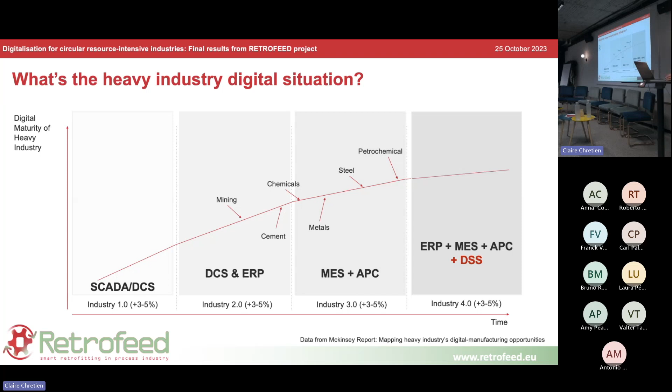So what we tried to establish in the past months is a sort of business model for other companies, even outside RetroFeed, to be engaged and to start using the platform that we built here, because we believe one of the important things of this project is to try to go beyond it, at the end of the project build something sustainable, or at least give food for thought for companies developing this type of application.

So the idea is, in the future, to build for every industry that is interested in integrating a decision support system like this one, starting with a pilot project built on very specific business objectives. We need to know what problems the company is trying to solve, and we need to know the type of data they have available. Then, together with experts in our company, we have a very good team of mathematicians, physicists, and engineers.

They develop algorithms and models, but also external models can be integrated into the platform to really build something comprehensive and integrated to improve the whole value chain. Then we can build together a solution, leveraging the platform we built here, that could help the user change inputs and see the results of the modeling, supporting them during operation.

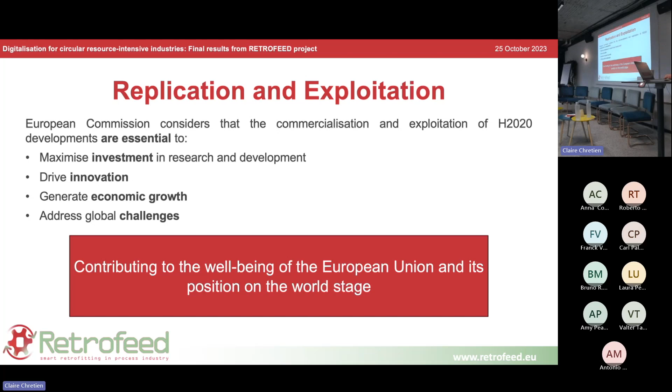As you can see, we have a lot of solutions that have been developed for some of the demo sites, or with the suppliers that demo sites have, or their own resources, but also with the support of research centers and other companies that provide the technology. If you remember the presentation of Roberto, the idea is to pass from TRL 5 to 7. But as you can see in the table, there are some solutions that are already in the market.

For example, the solutions in ASAS that have been developed by Sistem Teknik. Sistem Teknik is a technological provider in Turkey. They have the solution, it's patented, they have trademarks, so they are in the market. They have this solution in the portfolio.

Also the solution of RETROFEED that was commented on, they can implement it in other furnaces of the company, even in other companies. So there are solutions that they have to adapt, they have to do the calculation, but the solution is there. Or the burner that HTT developed in Pittini - this burner that allows the use of biochar and plastic grains can be replicated in other places.

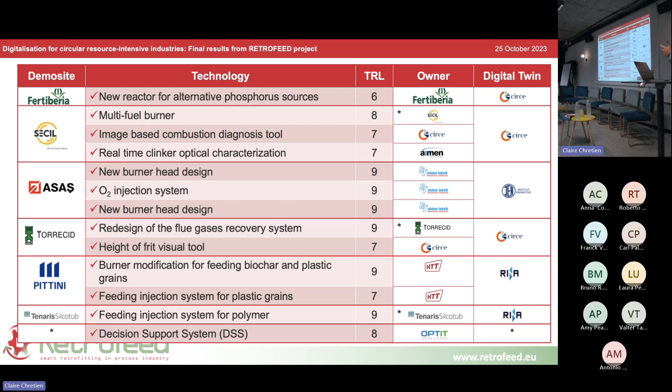So how can we increase it? What's the pathway to commercialize this solution? Probably we have to increase the market demand. It seems the market is increasing, the demand for this kind of solution related to green solutions, automotive solutions, digital solutions - they are in the market.

But I think that the companies, or I don't know, the European Commission, the politicians have to increase this market demand. And maybe as this market is increasing, we have the opportunity to sell this solution or to show this solution to the rest of the companies.

Also, it's important in the project to have horizontal results. For example, in the case of the DSS, it's a solution that can be used in all the sectors of the project. So it's easy to replicate in the same factory, in other factories of the group, in other companies of the same sector, even in other sectors, because we have the knowledge, we know how we can do it, and this is the way we can transfer all the solutions to other sectors.

Also, it's important to have easy replication. So we have made an analysis in the project to know if it's possible or not to make this replication easy. As I have commented, it's very easy to replicate in the same company, because normally they have the same burners, or they have a lot of burners that are similar, electric furnaces, kilns. So they have the opportunity to replicate this solution.

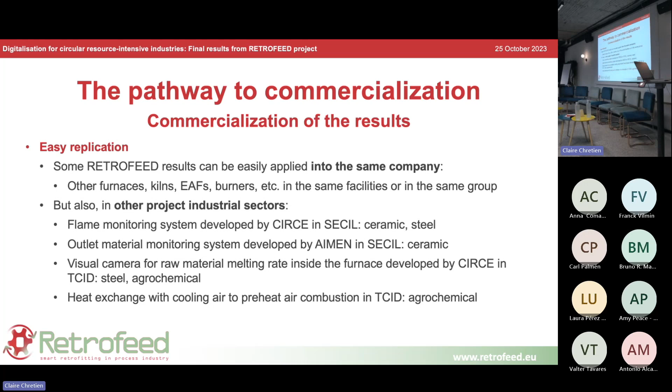Okay, I want to buy this camera that is used for that. Okay, we can - it's not an easy way to sell for this kind of research center, but we have the knowledge to use this technology in other sectors, and there are sectors that can use it. So this is also the way we can replicate this kind of solution in the project, and we have analyzed it, because we think it's important to know the potential of all the solutions.

And even other solutions are going to be in the market, or will have TRL 9, in the following months. Okay, because I think that this is one of the key aspects of the project. We have achieved this very high TRL 9. Of course, we have some barriers. We have problems reaching the market sometimes.

One of them is the legislative barriers. We have different legislations in each country. Each country has adapted the laws of the European Commission, but each one can adapt it, and this is a problem sometimes.

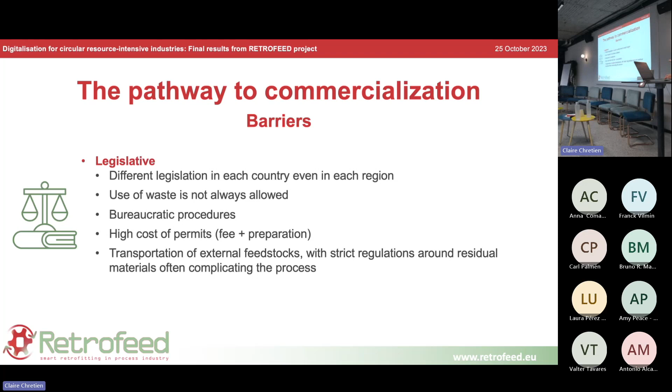For example, maybe through the associations that all of you have here in Europe, but also in your countries. I think that this is the way to try to avoid this barrier. But we also have other ones.

For example, functional. We are developing solutions, but sometimes they are joint solutions, and we have the problem of geographical location. Having a joint agreement on the exploitation is not an easy task sometimes, and I think that it's a problem for providing this solution to the market. As I have commented, the research centers have a lot of knowledge. We have the solution, and sometimes arriving at the market is so difficult.

Or even the solutions that are working in some of the demo sites need a lot of time to have real results, because we need large trials in order to prove that the solution is working. Because if you are going to make a solution that will stop production at one of the demo sites for 1 month, you have to show results proving that it works. And a project like RETROFEED is a good way to show that yes, the solutions are working, and you have the opportunity to implement them.

And also, for example, the technical. You have to adapt your installation. It takes a lot of money, and so this is a problem when you want to implement these solutions.

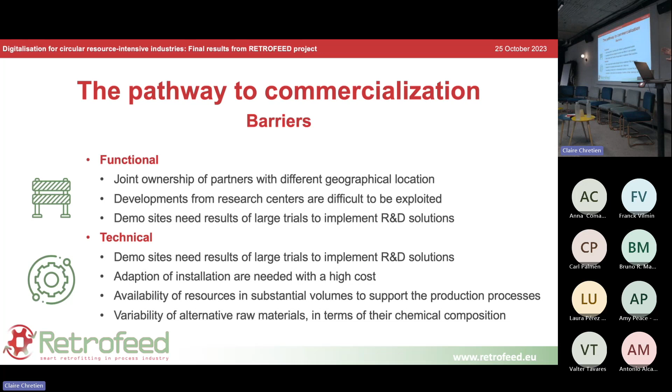But also, well, we have faced a lot of challenges in this project. The first one was COVID-19 for sure. After 6 months of the project, we stopped the face-to-face meetings. But it was also an opportunity for us. We increased the number of interactions through remote meetings.

I think that before COVID-19, making meetings with Teams or remote meetings was so strange. But now it's so typical and it's so easy. If we need a meeting each week, it's possible. I think that this has been an opportunity of the pandemic, taking into account all the problems.

Okay, but also the high price of natural gas. We have problems in some of the demo sites that have been stopped at some times, but the RETROFEED solutions are reducing the use of natural gas in some of the cases. So a challenge, but in any case, an opportunity.

The lack of components: also in some of the solutions that I have developed in the project, we have the problem of the lack of components, but it has also been an opportunity to find other solutions, to think about how we can change to use another component. And I think that has been also very interesting for all of you.

Of course, the increase of the price of materials. So yeah, well, I think that RETROFEED is helping with that. We increase the impacts you have commented on before. We're increasing the energy efficiency, so we are reducing the cost of the energy. Also, the increase of the resources. So, well, that has also been an opportunity for us to show the results.

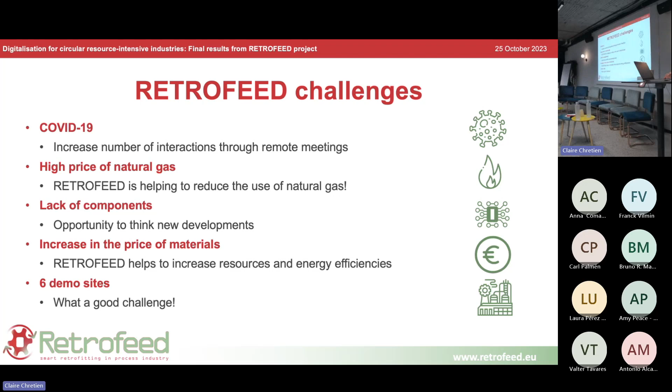And also I have to remark that we have 6 demo sites that are selling products. The main core of the companies is selling products, and trying to adapt or make this modification in the core equipment is sometimes not an easy task, and we have made it. So that's also proof of the project. So that's all from my side.

Well, we have made a lot of solutions that are in the market or close to the market. You have the opportunity in the project to show the benefits and the impacts of RETROFEED. I hope that it helps you in the future to obtain your goals of net zero production, reducing greenhouse emissions, increasing energy efficiency. So thanks for your work in this project. Thank you.

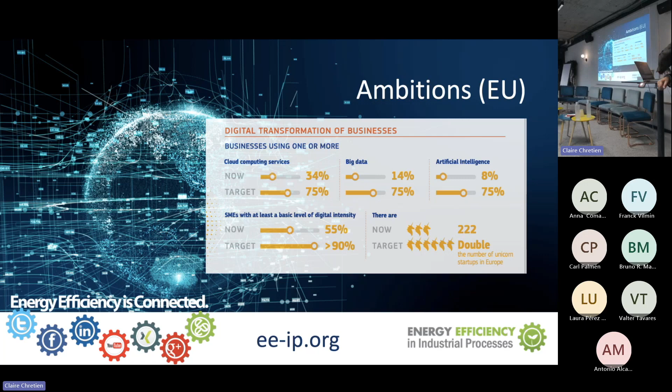Rod, I hope that's good. Thanks, Dusan. This is excellent. It seems very strange that for this project, we have 29 minutes left. Okay. I'd like to call all the panelists, whose names escape me right now. There you go, they're here. So Attila, Francisco, Yaroslav, and Sofia, could you please come up? And also Luca and Diego and Dusan. I want you all here. Maybe you can invite Roberto too. Roberto can come. I'm happy to have everybody, okay? I will stand with Rod. Okay, Dusan will stand.

Now, I mentioned the human element of it, and people asked me last week, what questions are you going to ask? And I said, there's only one question I want to ask you. From this project, what motivation and what increased capacity have you been given to move forward in this whole field? What's come to you from this project that you're going to take forward into the new phase of your career? So we can start right here. Thank you.

There are a lot of things happening in this project, and I think we realize that we're really part of it. So many things have happened. We have gone through crisis, and some of the demo sites had to change their feedstock delivery and had to stop due to the energy crisis. And this is the future. It has really pinpointed how important it is to work with flexibility and resource efficiency. We have really realized this during the project. So how have you grown in this? In that sense, it gives motivation. We know we are on the right path.

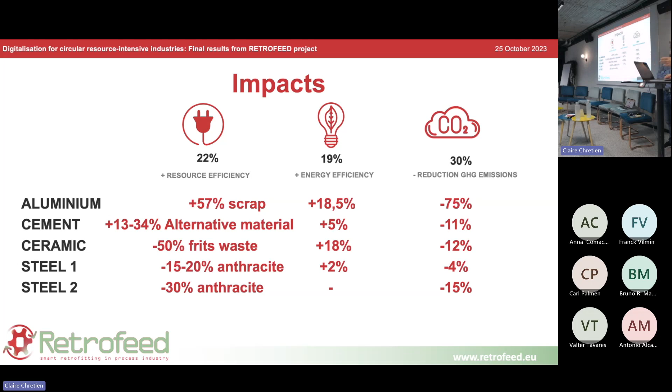But in any case, for all the demo sites, the solutions that we have implemented in RETROFEED, the new sensors, the new management and control system, the DSS, have helped to obtain this impact. So just to point out that the work has been done perfectly during these 4 years. So these are just my words for that. So now I think that it's time for Jürgen.